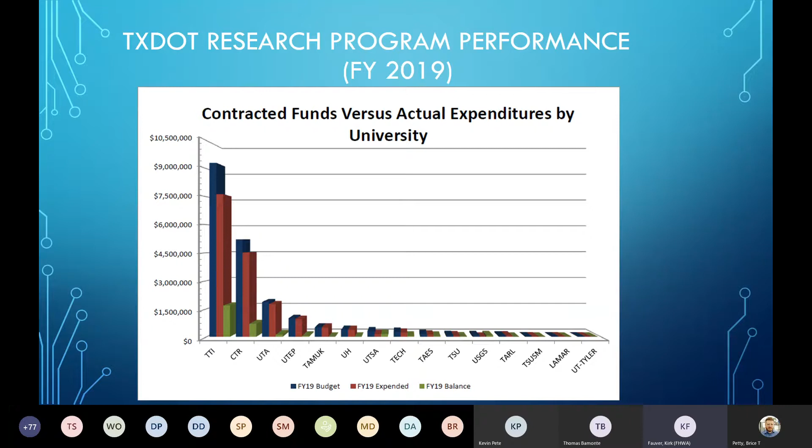These are the contracted funds versus actual expenditures. I think TxDOT RTI has a goal of 85.5%, and I believe we're meeting that across the board by each university in terms of the amount allocated for contracts versus actually spent. Next slide.

These are expenditures by program. Research by far has the largest amount of program funding, about $14.6 million. And for implementation, about $5 million. Next slide.

TxDOT has a research activities website, so if you wanted to find out more about the TxDOT research programs, there's a keyword search you can look up, like drones, disaster response, the value of research, work zone safety. Those are hot topics, and video summary reports for completed research. Some of the completed research products are available. Next slide.

Functional area committees - I'm going to skip over this because Kevin has already mentioned the functional area committees.

These are the 5 functional areas. Research Oversight Committee.

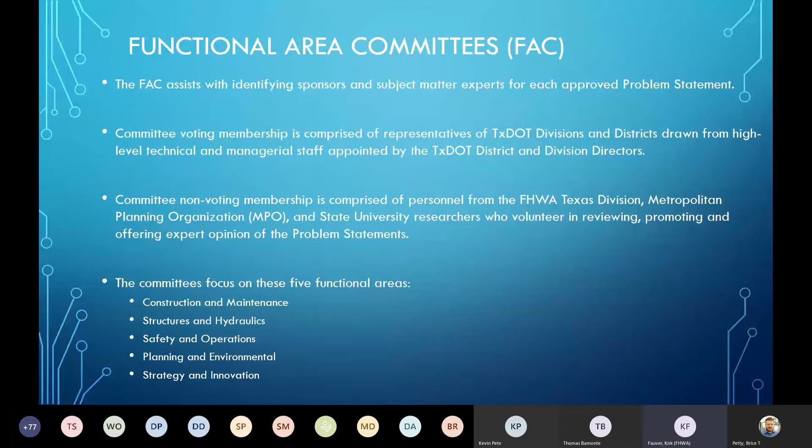This is the 15 ROC members. There are 9 voting members of 5 division directors that Kevin mentioned, the 5 non-voting members, and there's 1 member from Federal Highway Texas Division that make up the ROC.

This is more information about the ROC, who and when they meet, and how they discuss and prioritize the recommended list of problem statements before submitting the final recommendations for approval to the executive committee.

As part of the research selection process, the problem statements are gathered and the TxDOT portfolio manager reviews the problem statements for completeness, eligibility, and so forth.

The problem statements are rated, prioritized, and the FACs are meeting to discuss the problem statements. They are reviewed and combined at some point if they are of similar nature, and the resulting list goes to the ROC.

This is more information about the research selection process and how the problem statements themselves are converted to project statements, and then as the basis of requests for proposals are sent out to the universities for bidding purposes.

This is a diagram that shows the committee involvement in the research program - the functional area committees, the research oversight committee - and it is a loop that goes around. Federal Highway approves the work program development, but it goes back, and the research program is approved and the projects are activated.

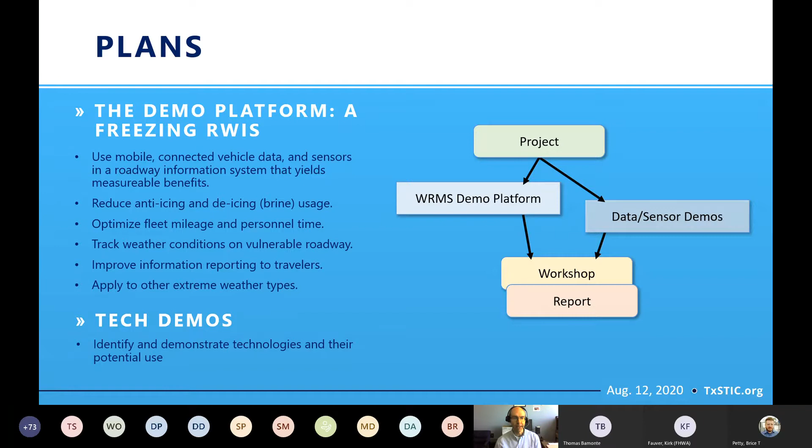Next slide, please. So with that, our strategy really comprises these goals of trying to reach objectives of reducing brine treatment, reducing impact on roadways, and reducing the effect of travel time changes when there's winter weather treatment. As researchers, we have certain ideas on what's possible, but really the most effective way to prove or generate ideas is to have technological demos—to demonstrate real technology in real scenarios and see if our ideas work, and see if new ideas come about in the actual application of those demonstrations. Next slide, please.

Our demo location is within Abilene, Texas, which is a moderate-sized city in a very rural area. They actually do have winter weather and have to do a lot of work to proactively prepare for it, continuously treating the roadways during times of impending winter weather so that severe ice situations and dangerous snow buildup do not happen. This is a very interesting area because it provides a good proving ground for the use of the sensors and the computing backend analysis that we're trying to apply to the project.

In a nutshell, we're illustrating the effectiveness of this project by describing the sorts of data sources that we're trying to put into places that are very accessible to traffic operations personnel. First of all, there's the already existing Lonestar active traffic management system.

There's also the GeoEvent server and Esri resources that TxDOT is starting to bring on within their redeveloped IT infrastructure. Part of that infrastructure has the ability to take in vehicle locations and trajectories from a fleet management system being deployed within TxDOT now. Almost all TxDOT vehicles are equipped with a fleet tracking system able to track GPS locations of those vehicles for reporting purposes, and also to have live data go into a GeoEvent server where ArcGIS-based applications can leverage that data for real visualizations.

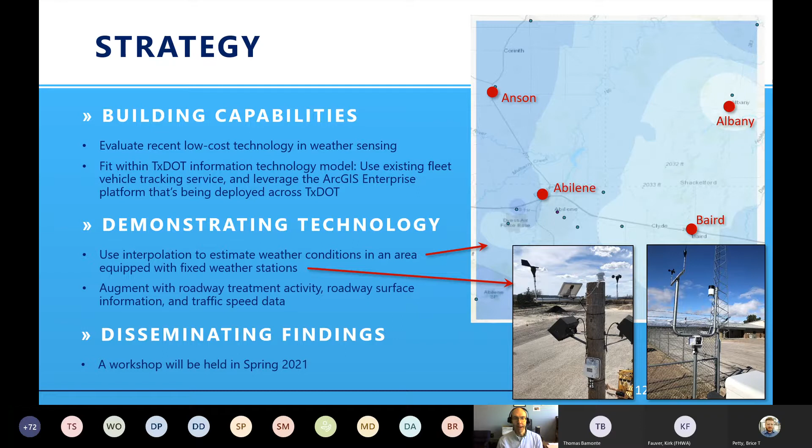We're also planning to hold a workshop in spring next year, which will describe what we've done, what sorts of sensors we used, what we could expect from them, and have game plans for how other districts can implement similar systems within their own places.

Right now, we're working with an engineering firm within the Abilene area on being able to equip winter weather treatment vehicles with sensors that detect whether the sprayer is turned on or off, whether the spreader is actually spreading sand on roadways, or if the plow is lowered or raised.

These are actually rather simple sensors, but they involve some expertise to design. Within the project, we are designing four sensor kits that will be installed on four different vehicles, and we'll document exactly what those sensors are and how they can be hooked into the existing fleet management system. Again, the whole goal is to be able to reproduce this effort within other districts so that they'll have the same capabilities as what we're trying to demonstrate within the Abilene district.

In fact, today I'm going to be hopping in my car and driving up to Abilene to meet with that engineering firm tomorrow for delivery of those 4 sensor kits. So this is a very exciting time for the project in that regard.

Meanwhile, researchers here at UT are working on incorporating the data feeds that will be coming from those sensors across the fleet management system into visualizations based on the ArcGIS Online platform. We're also working with Devin Smith on some of the tracking systems and visualizations he's working on, so that we can add winter weather treatment activity to those same visualizations, which have already been demonstrated to a few folks within TxSTIC.

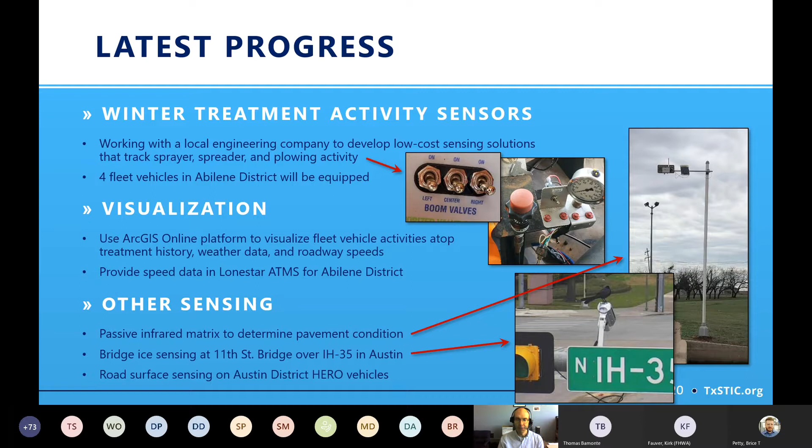We'll continue to push forward with our bridge ice sensing effort on the 11th Street Bridge in downtown Austin, and also work on incorporating one of the road surface sensors on a HERO vehicle for incident detection within the Austin district.

Next slide, please. Our schedule looks like this: the winter season is coming, and during that time we will be collecting data during the freezing days and really understanding what kinds of data, and what we can do with the data, from those winter weather sensors.

And then in the spring we'll have that workshop. Stay tuned for the date on the workshop, most likely held virtually and, if permitting, in person in Abilene. Next slide, please. This is a log of activities that we've done for the project.

Right now, imminently, we have our bridge deck freezing — we had in February the bridge deck freezing measurements. And then imminently this month, we're going to be receiving the 4 sensor kits for equipping the winter weather treatment vehicles in Abilene. Next slide.

So with that, I thank you for your attention and invite any questions that you have. I don't see any questions or hands raised, which I'm surprised at. This is a great presentation.

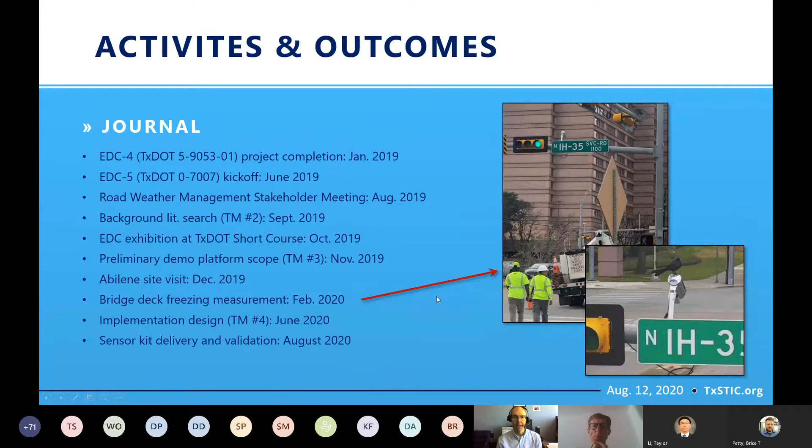Yes, if feasible, can you go back about 5 slides? There's a data architecture slide where we've listed the various sources we're looking at. Because of the time limit of the presentation, I just wanted to focus on the weather sensors we're deploying, but we're also looking at the West Texas Mesonet data sources, which have a couple weather stations within the area, and also the National Weather Service. We want to overlay those as part of the data sources available among the weather stations we're deploying. With that, we'll have a better sense of what we can get from weather sources that already exist versus the sources we're deploying. That can help us answer questions on how worthwhile it is for us to deploy our own weather sensors, or whether we can really rely upon those weather sensors provided by other entities.

With that, we can also get a better sense on reliability and resilience, just in case there's failures, or if we have a situation where we have various geography which would really isolate weather scenarios or weather phenomena within localized areas. So all these are very valid questions I'm hoping we'll be able to present more in depth in our seminar that we'll have in the spring.

Yes, I have heard of another project happening — Wade might have to remind me on this. There's a district up north that's also doing a test equipping winter weather treatment vehicles with sensors that detect treatment activity. There's also other DOTs across the United States very actively looking into this. In fact, that's going to be a lot of the talk happening next week at the Road Weather Management Stakeholder meeting happening federally, virtually.

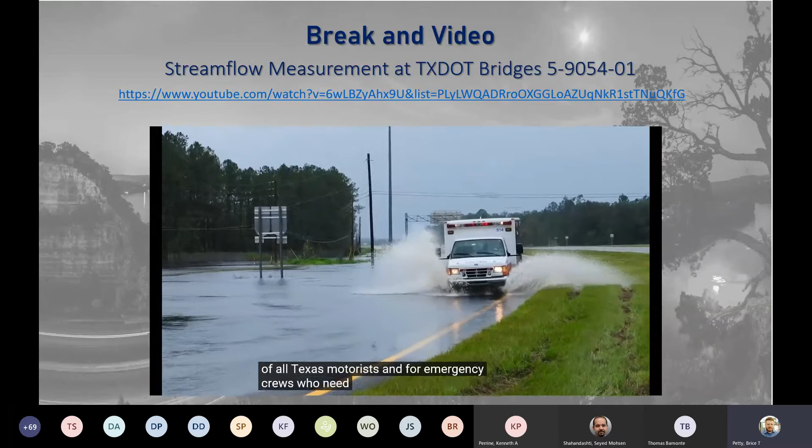Imagine being able to predict when rivers and streams will flood and make a roadway impassable hours before it happens. It would be huge for the safety of all Texas motorists and for emergency crews who need safe passage in order to provide help.

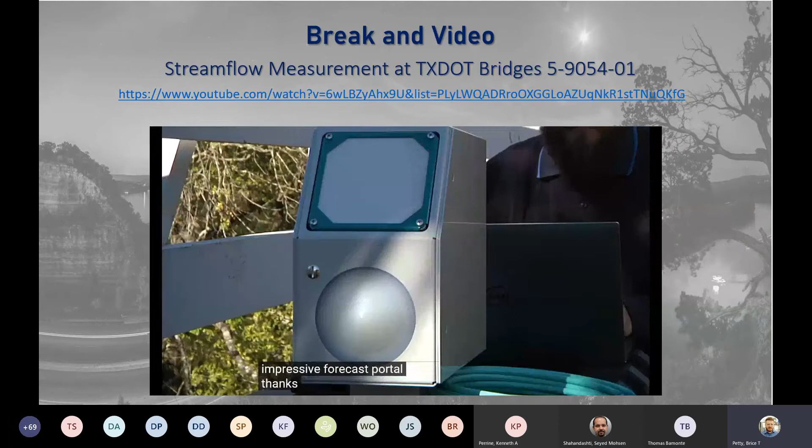Researchers at the Center for Water and the Environment at the University of Texas have built an impressive forecast portal, thanks to unique radar sensors installed at 20 major water crossings along Interstate 10 between Beaumont and San Antonio. With 27,000 bridge locations in Texas, this could be just the beginning of an entire bridge system that could be monitored online, forecasting floods and saving lives across the state.

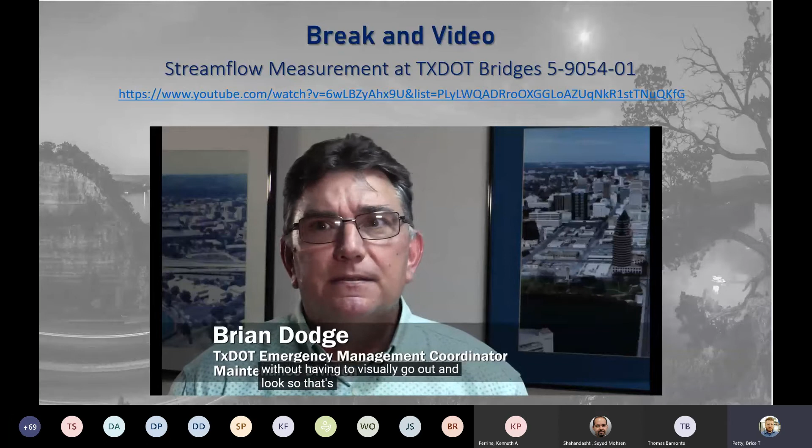These stream gauges are giving us information we've never had before without having to visually go out and look. That's a benefit in itself. Knowing that there's a flood wave coming downstream and it might affect one of our structures or critical routes is key to being proactive when it comes to emergency management instead of reactive.

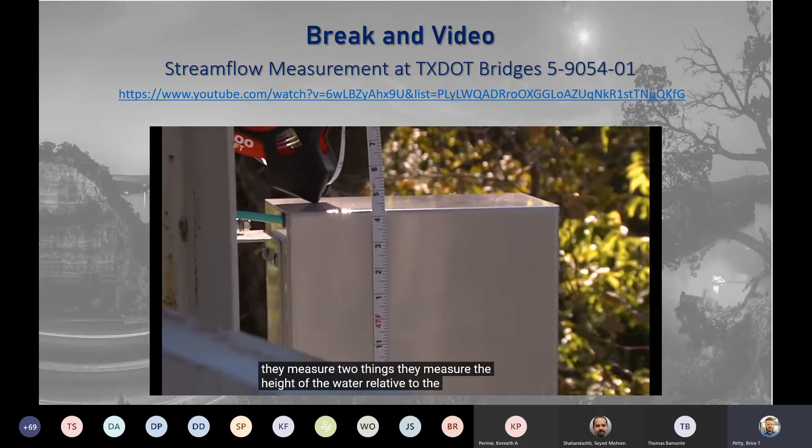The gauges we're putting in are non-contact gauges that work with radar technology. They shoot a radar beam down to the water level and measure two things: the height of the water relative to the gauge, so they know how close or how high the water is, and the speed of the water as it's moving. So they measure depth or height, and velocity.

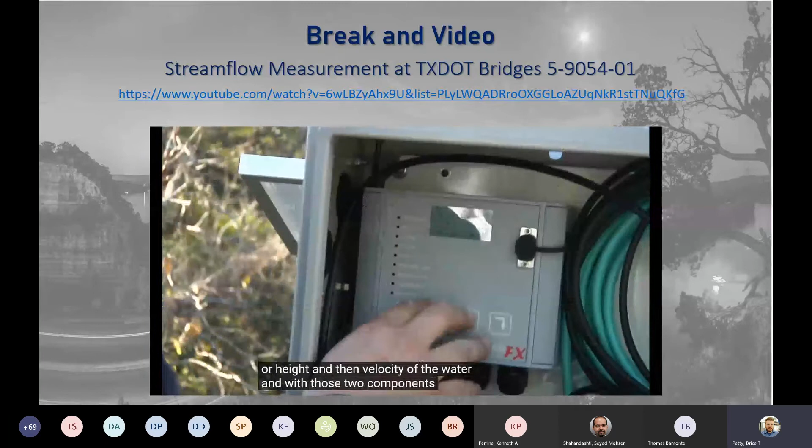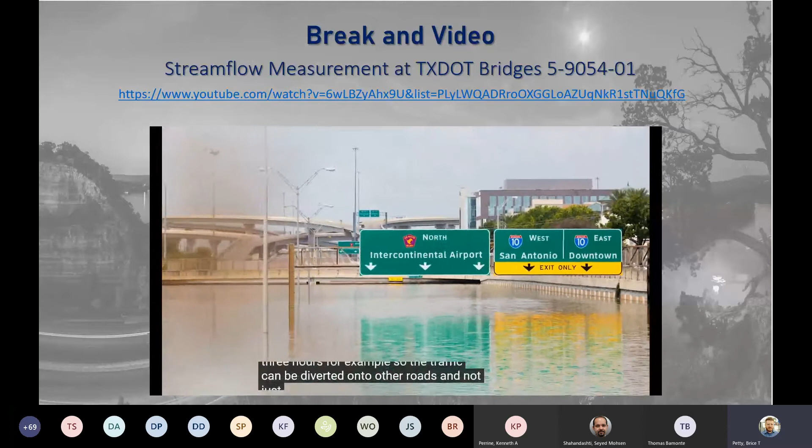With those two components, that information feeds back into the system to try to predict what's going to happen. With that, we'll be able to more accurately understand the likelihood that I-10 will be flooded, and forecast it. So it's not just that we'll have to close I-10, but we can anticipate that I-10 will be closed in 3 hours, for example, so traffic can be diverted onto other roads instead of suddenly reaching an endpoint with no place to go.

I-10 was selected as a key primary roadway. We cared about that, and we saw for Hurricane Harvey and other events that I-10 is a pretty important corridor, and when it goes down, we need to be able to reroute traffic and have alternate routes available to folks. So you click on a given gauge, and it pulls up information about that gauge.

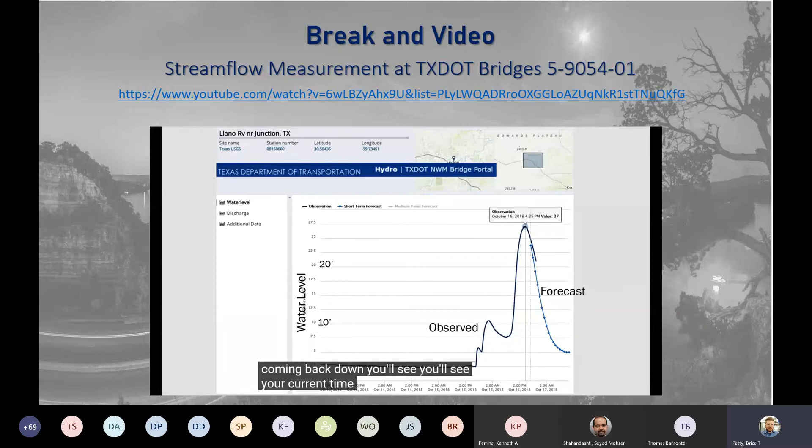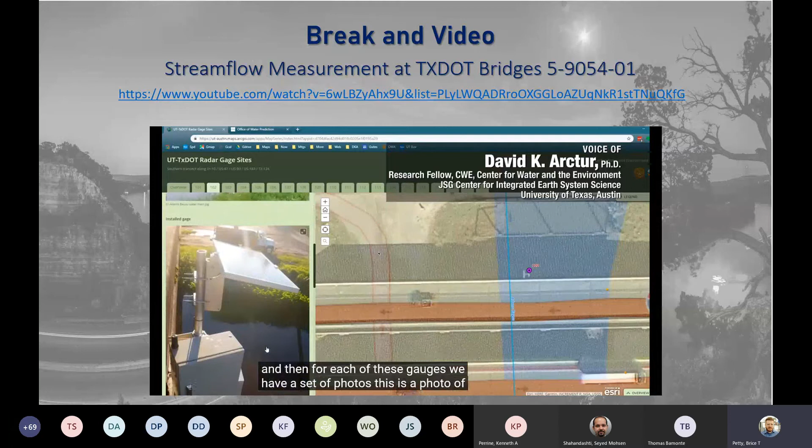What you'll see is basically a stage hydrograph, the level of the water going up and going down, some prediction of the water peaking, flooding at the height, and then coming back down. You'll see the current time, and then the prediction moving forward in time of what's going to happen in the future. For each gauge, we have a set of photos of the installed gauge, and elevation data detail, so we know the distance from the top, to the lower chord, to the water level, and to the stream bed.

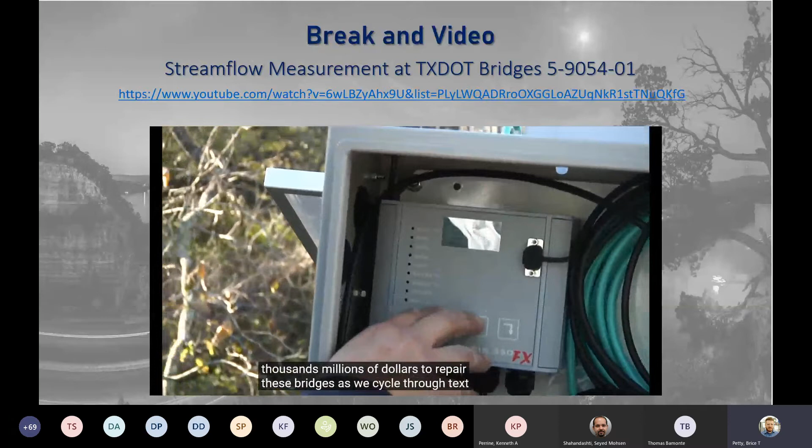It's kind of an exciting thought that as our bridges get repaired, these bridges are hundreds of thousands, millions of dollars to repair. As we cycle through TxDOT over time and repair these bridges, the cost of installing the gauge isn't that expensive relative to the cost of the bridge. So there's real potential to work it in as an optional but regular feature on certain bridges.

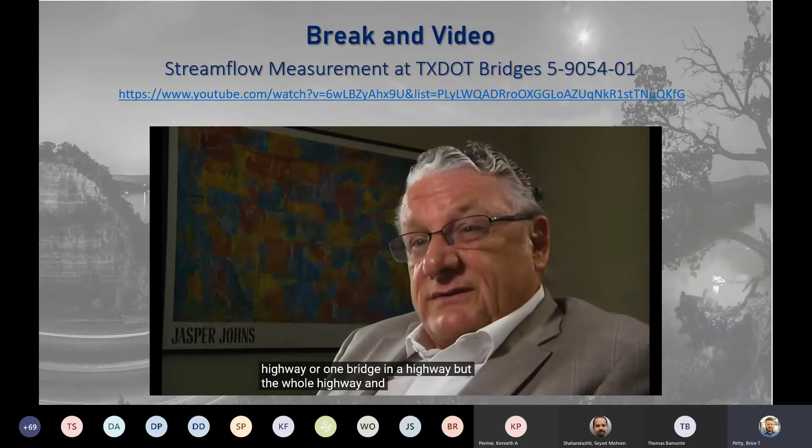We're not just talking about one bridge, we're talking about the whole bridge system here. Not just one highway or one bridge on a highway, but the whole highway. And that's not something that I, at least as a hydrologist, have really thought a lot about before.

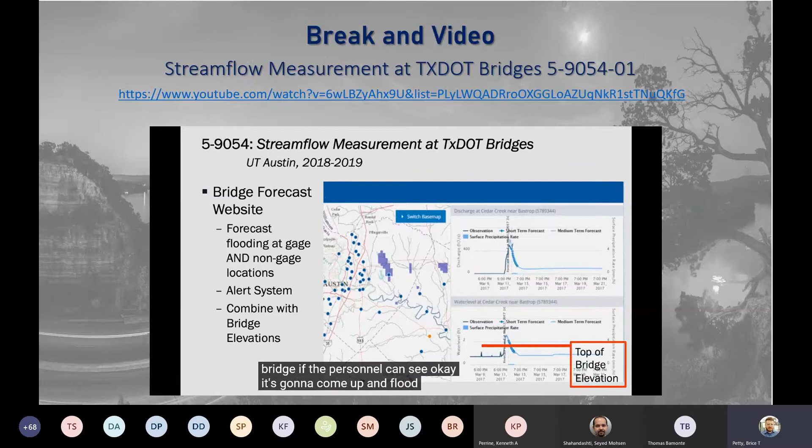The missing piece of information we're looking to supplement with this project is, what's the level of the bridge when you see that curve going up and down from the Weather Service? Such and such river's going up and down—how high is it going to get, what's it going to crest at? But with the elevation of the roadways and the bridge, if personnel can see it's going to come up and flood the road here, then come back down and not flood the road over there, you suddenly have a time window, a projection that these roads are going to be underwater for 2 hours, or 6 hours, or 2 days, or whatever.

Being able to forecast and anticipate that is what we're hoping to do—pull the information from the gauges to the website, and then the website can send alerts and notices to our response teams that have to deal with how to shut down those roads.

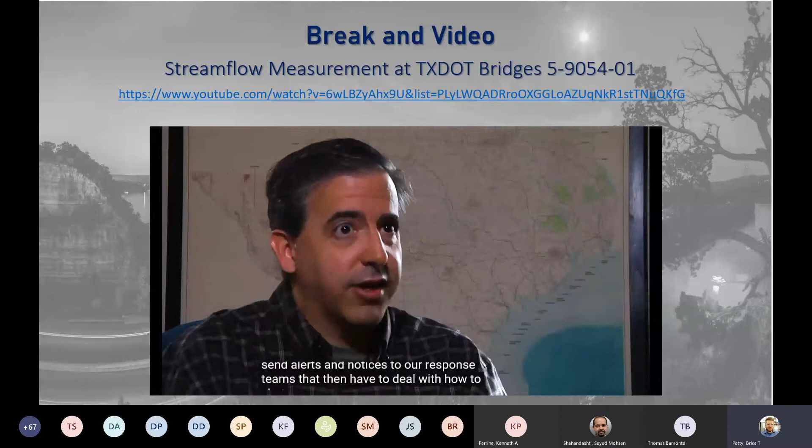Right now, we're very reactive when it comes to flooding. We have to see the flooding happen before we can react to it. This technology is probably going to give us some insight into what's coming, so we can stay ahead of it as much as possible and protect the traveling public.

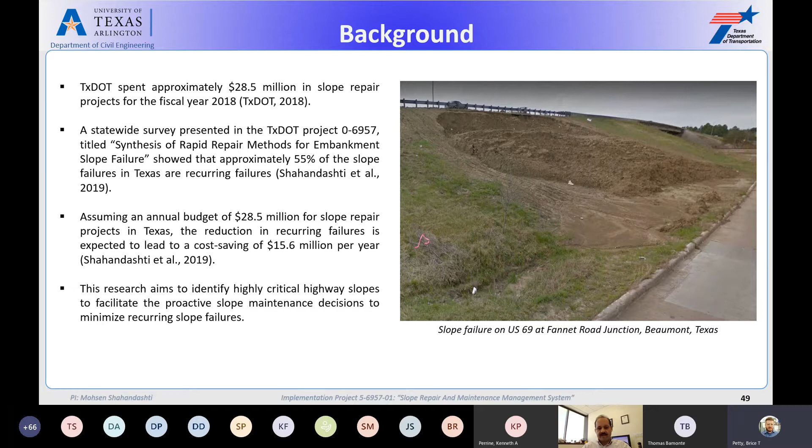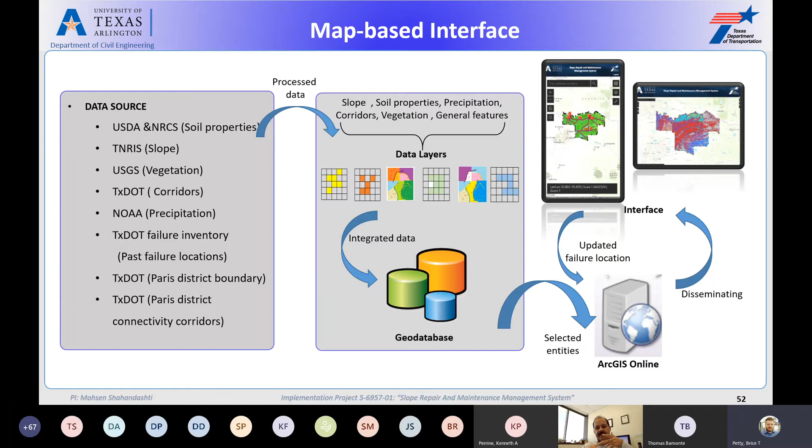We combined these data from different sources in a geodatabase, and we developed a map-based interface to visualize the data. This map-based interface is web-based and works on smartphones, tablets, and of course desktops. Next slide, please.

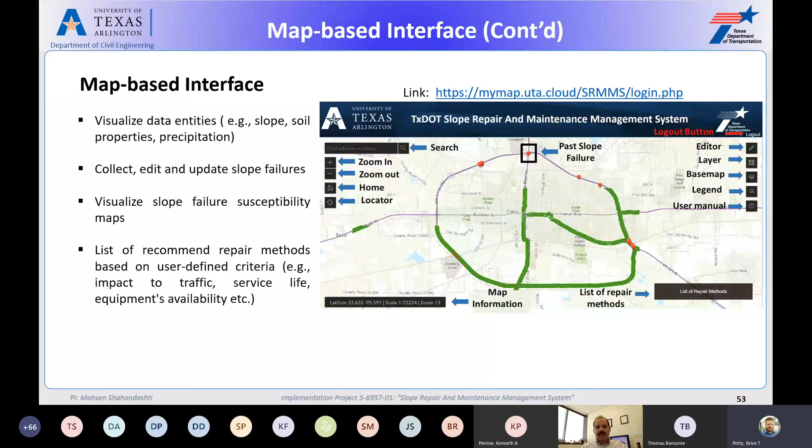This map-based interface helps us visualize the data that we collected. We can collect, edit, and update the slope failures, visualize the failures, and come up with recommendations for rehabilitation that minimize the chance of recurring failures. For now, access to this system is protected by password, so only TxDOT personnel can, after signing up, log in and use the system. Next slide, please.

Highly critical means that the trigger is rainfall. All our models are rainfall-induced models. If with less than 3 days of raining we have a critical situation, we call those segments of slopes highly critical. If between 3 and 10 days of raining makes it critical, we call it critical, and so on and so forth. So we color-coded the susceptibility of slopes along highways.

Our physics-based methods are based on factor of safety, and the trigger is duration of raining, and I mentioned how we color-coded that.

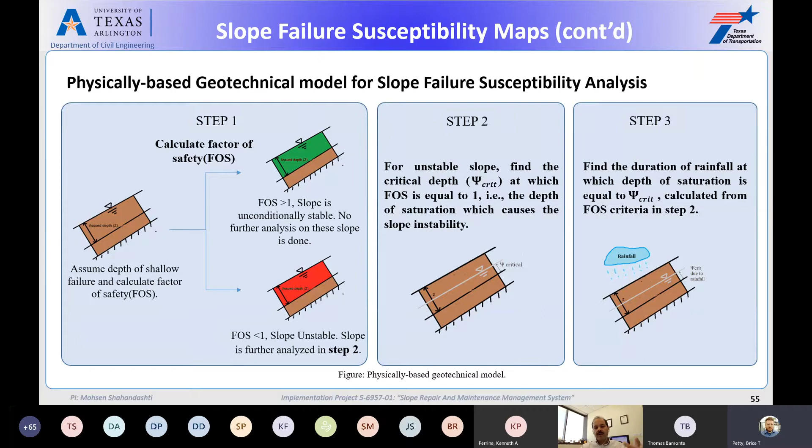Our models, we also calibrated them for previous stabilization efforts. We found that in many areas that we find critical, we already have mechanically stabilized slopes that are not critical anymore. Also, we calibrated our models for vegetation density of slopes along highways.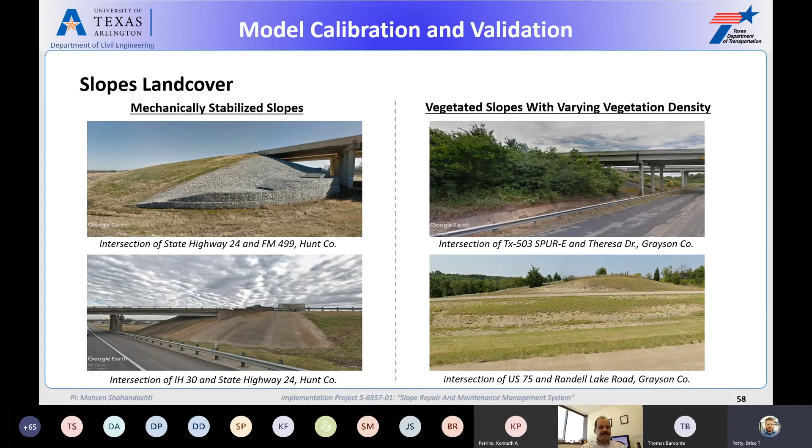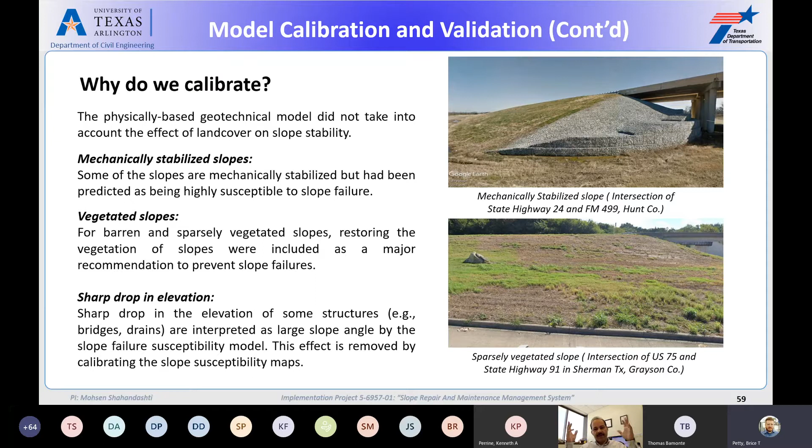In addition to mechanically stabilized slopes and vegetated slopes, we sometimes have, interestingly, sharp drops in elevation, but it's not necessarily a slope. Our system was showing them as critical, but they are not really critical. So we calibrated our models to remove those as well.

For example, for retaining walls, how we calibrated is we superimposed the images of the stabilized slopes on top of our susceptibility maps, and we removed them as critical, as you see in this figure.

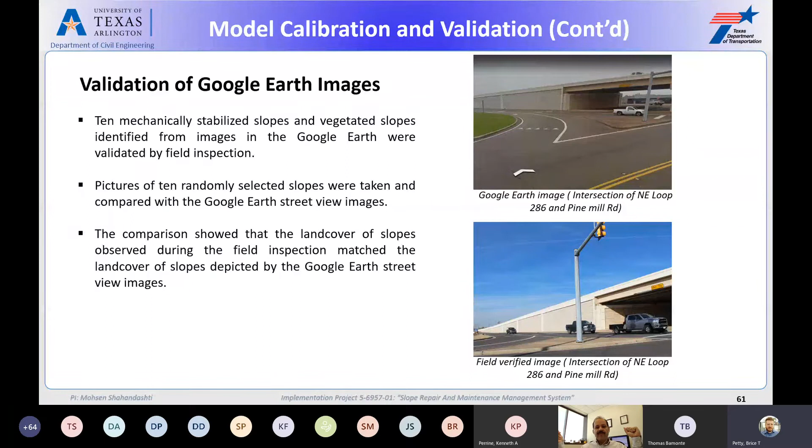Since we used images for this calibration, we validated our images with extensive field work.

On top of all these, we created a multi-criteria decision support system to recommend the slope repair methods and rank them. We integrated this system with the slope maintenance management system.

Using the ArcGIS method, the web-based method, this integration offers a list of repair methods. If we want to repair somewhere, with a few clicks we can find a list of methods. We can add our criteria, and we get a list of top 5 repair methods that can be used there.

For each of these repair methods, we compiled a list of best practices to minimize the chance of failure for that type of repair.

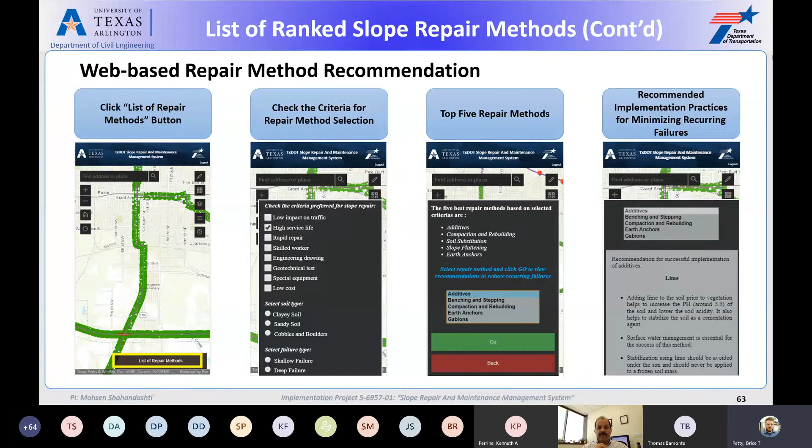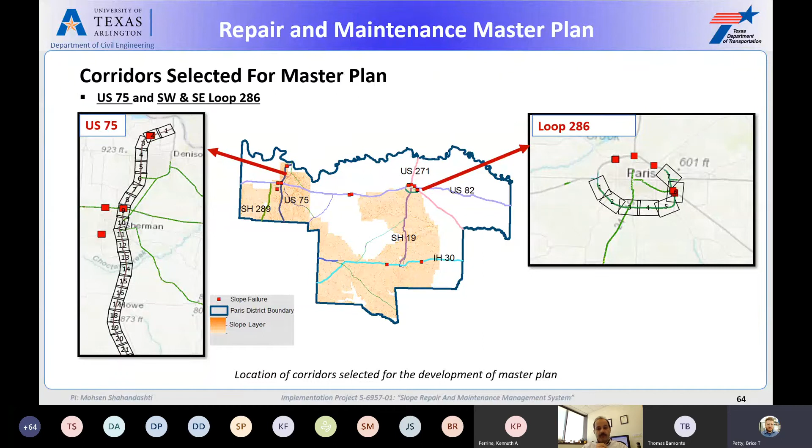We are preparing a master plan for 2 major corridors in Paris district, US 75 and Loop 286 around Paris district.

We divided these corridors into 1.5 mile strips, and for each of those we are highlighting the critical slopes, indexing them, and also creating Google Earth images of those areas that are highlighting the vegetation and water management system conditions.

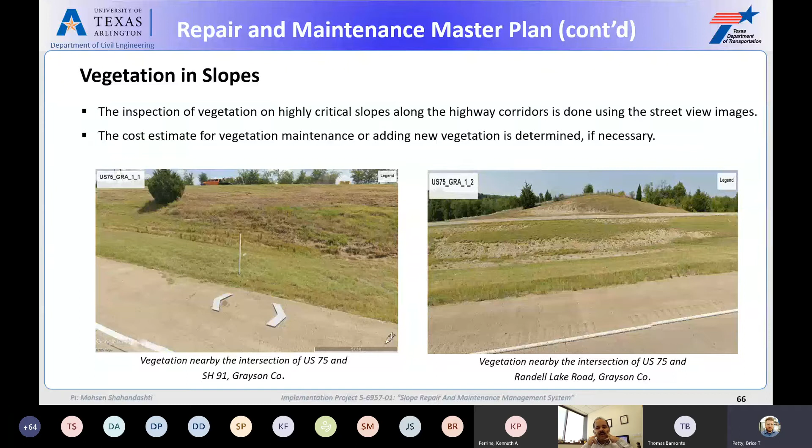Especially, we are interested in vegetation around those critical locations. We provided figures to show how critical they are, if they are in good condition or not, and if they are not, we are recommending the repair of them.

We are evaluating the water management system on those critical slope locations. If we need repair or maintenance, we are highlighting that on the master plan.

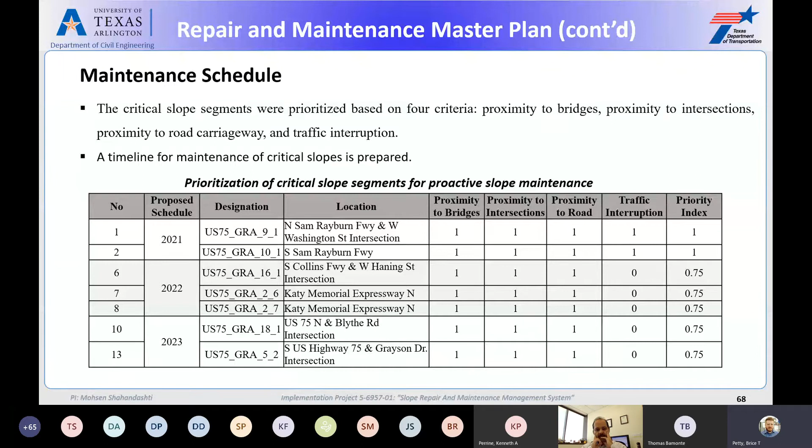We are putting together and prioritizing these critical locations in the master plan by their proximity to bridges and critical roads and intersections, and also the chance of traffic interruption. So we are prioritizing those sections as well.

We are putting together in the master plan the order of magnitude cost for slope repairs along highways for all of those critical locations that we found.

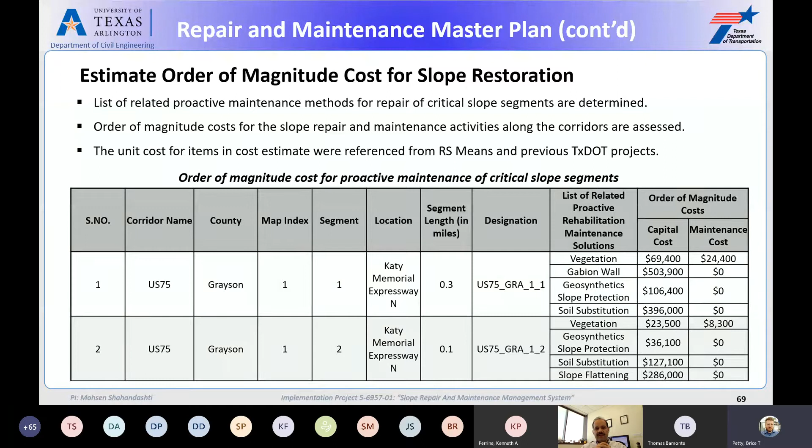And that's it. Thank you very much. I really appreciate that you listened to this presentation, and I welcome questions.

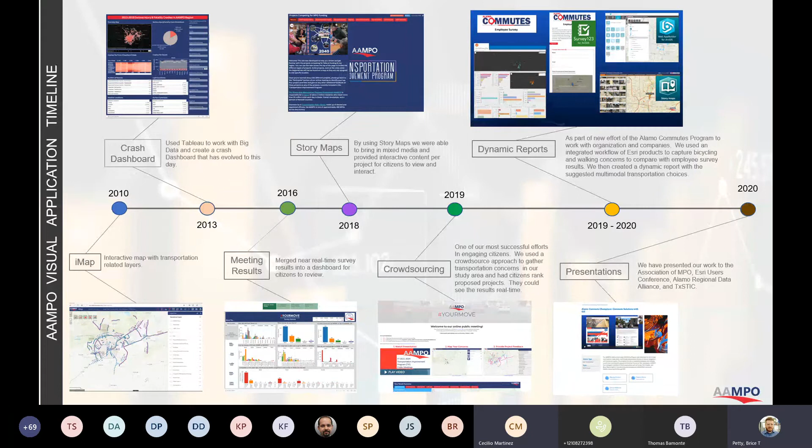So let's take a look at our first application. iMap was launched in 2010 and was our first application to go online. The interactive mapping viewer has multiple transportation-related layers and tools to assist you in your analysis. It also contains links to our open data site, our crash stats dashboard, and access to our travel demand model data.

Here's an example of freight data showing truck count and percent trucks within selected roadways. This visualization was greatly valued by local planners.

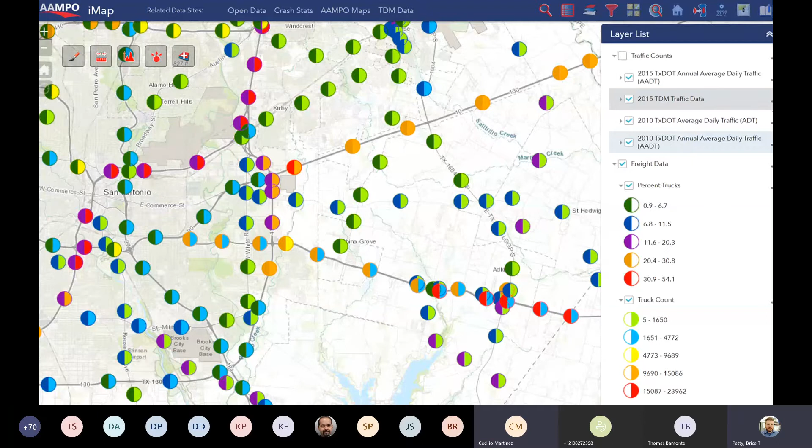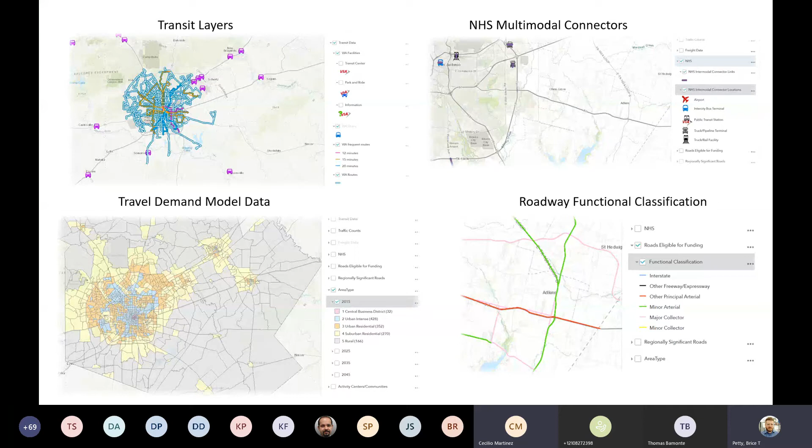We not only have our data layers on iMap, but also from our transportation partners like Via Metropolitan Transit, TxDOT, FHWA, and our travel demand model data. So you can tell we have a lot of useful data on this application. But as we started to get more robust data sets like the crash data, we needed a different solution.

Tableau offered an affordable solution, and by affordable, I mean free. Tableau offers a paid and free version of its application. We started using Tableau back in 2013 and still use it to this day. It's a powerful and easy way to visualize your simple and complex data. Here we have taken the crash data and created an interactive dashboard.

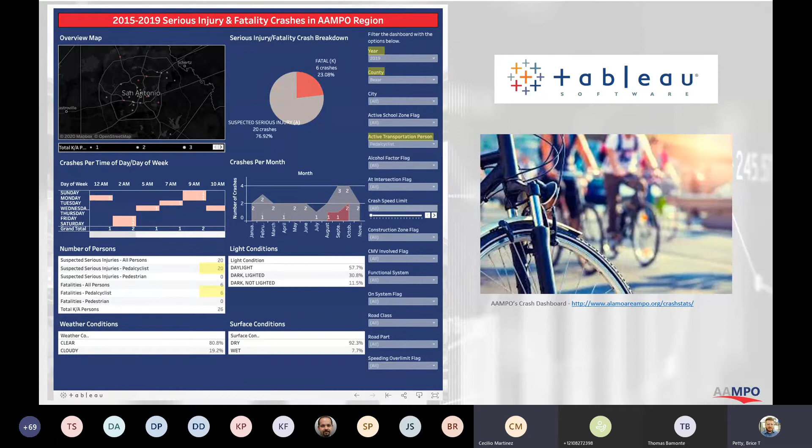With this dashboard, we're able to ask questions and based on our criteria, get answers. In this example, we can select the crash year of 2019, the county of Bexar, then select bicycle-related crashes only. The results are dynamic, displayed in an easy way to identify trends. Not only do you get stats, but also the locations of these crashes.

Next slide, please. One of our most interesting uses of Tableau is linking our travel demand trip generation forecast numbers to create an origin and destination interactive map.

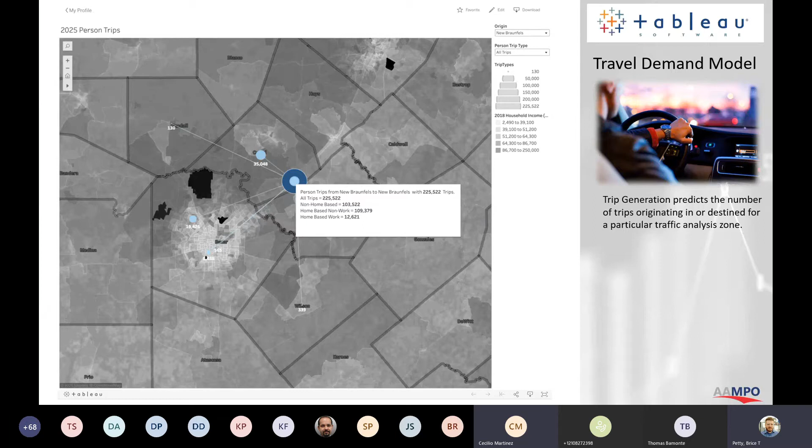Users were able to select areas within our study area and see how people moved in and out based on trip purpose. Here we can see 2025 person trips and how it relates to the city of New Braunfels' internal and external trips. Next slide, please.

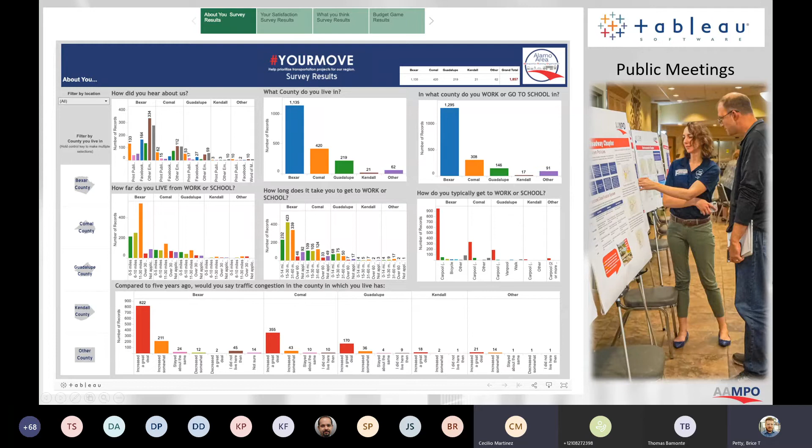Finally, we use Tableau at public meetings and online to visualize survey data from citizens and present the results in near real time. This was useful, but we needed more flexibility at our public meetings and online. As citizens became more tech savvy, the demand grew more for that interaction. Next slide, please.

So in 2018, Esri launched a suite of applications to include story maps. This was a solution that we could use to engage citizens in a more interactive experience. We were able to embed multimedia applications like YouTube videos, PDFs, and a mix of interactive maps. Next slide, please.

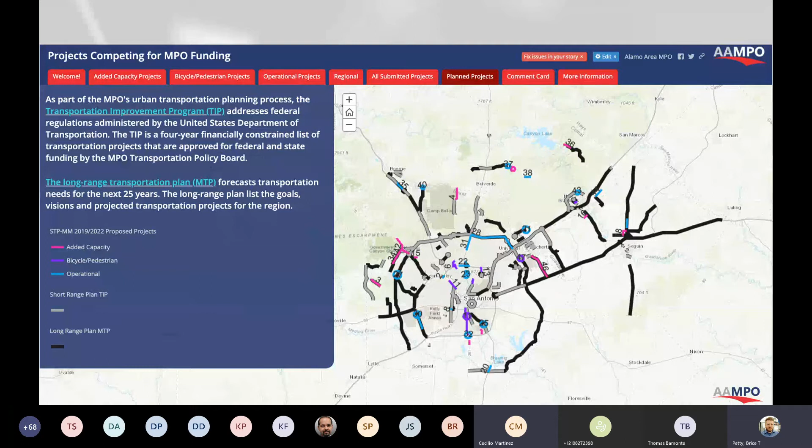Citizens were able to view multiple interactive maps in one location. Here we are showing the proposed roadway projects against existing projects for connectivity. This is a good start and was leading to something very promising. Next slide, please.

This was our very first true attempt at crowdsourcing, and this was part of our 2019 Your Move campaign. We created an easy step-by-step online experience for citizens. Two crowdsourcing applications were developed in-house: Map Your Concerns and Provide Project Feedback. Next slide, please.

On Map Your Concerns, citizens were given four categories: active transportation, public transportation, traffic congestion, and traffic safety. We asked them to identify their areas of concern as related to these categories. Next slide, please. So citizens could provide us with detailed information on their concerns, and others could rally behind it by liking it. Next slide.

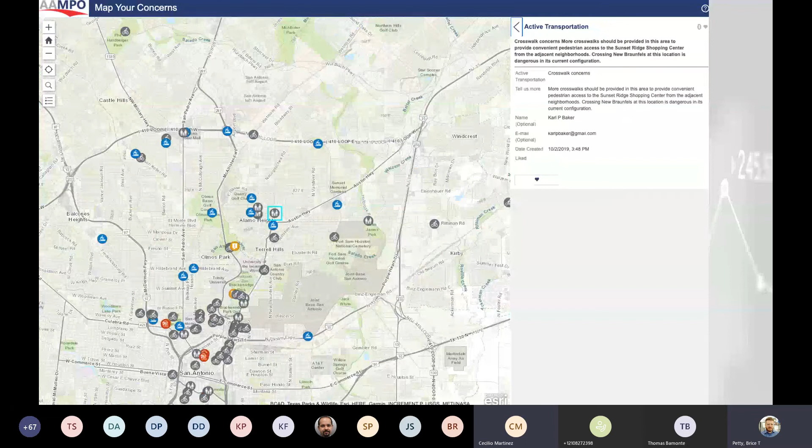Go back one slide. So we could then dynamically rank concerns based on the number of likes. Go forward one slide. There we go. As you can tell from this screenshot, you can start to see that ranking. As citizens were submitting their concerns, other citizens were able to like that comment, and that would then bring it to the top.

Next slide, please. The second crowdsourced application was Provide Project Feedback. In this case, we wanted comments on our current long-range and short-range projects. We were once again able to collect number of likes per project and also rank them dynamically.

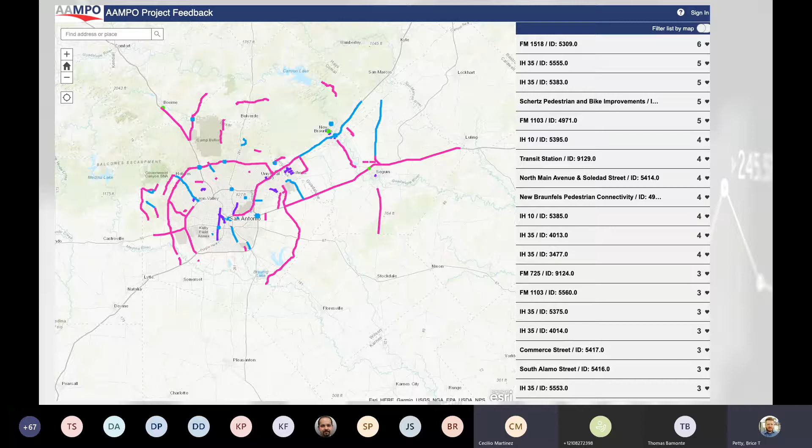Next slide. In addition, we were able to collect comments from citizens that we could then pass along to the project sponsoring agency. Next slide, please.

Citizens were engaged and found the application easy to use. We even had community leaders sharing the applications on their social media platforms. We found this endeavor to be one of our best outreach efforts. Next slide, please.

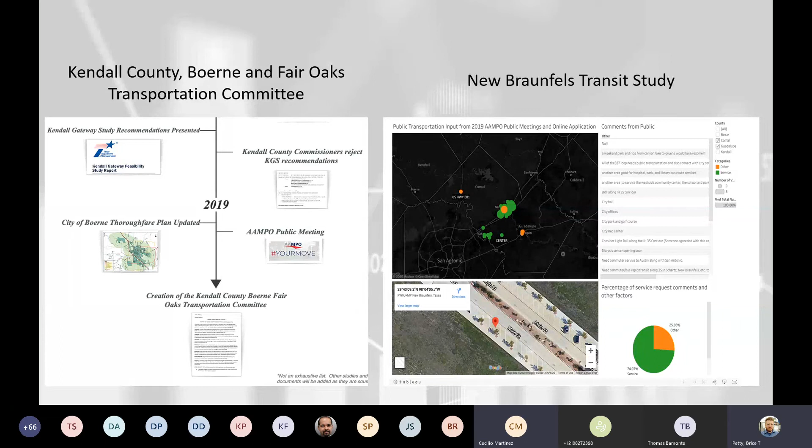The data collected from the Your Move campaign was used to supplement two separate transportation planning efforts: the Kendall County, Boerne, and Fair Oaks Transportation Committee, and the New Braunfels Transit Study. So we took that information we collected from the Your Move campaign and these other two separate planning efforts, then utilized that information. Next slide, please.

The Kendall County, Boerne, and Fair Oaks Transportation Committee were so impressed with the Your Move format and workflow that they asked us to create a similar campaign for them. They called it Plan Your Mobility. It very much mirrored what we had created for Your Move, and it was very effective.

Next slide, please. Finally, we were able to use all that we've learned with story maps, surveys, and crowdsourcing and applied it to the Alamo Commutes program. The program launched an effort to work with local businesses and organizations to encourage their employees to consider multimodal transportation options as they made their way to work. Next slide, please.

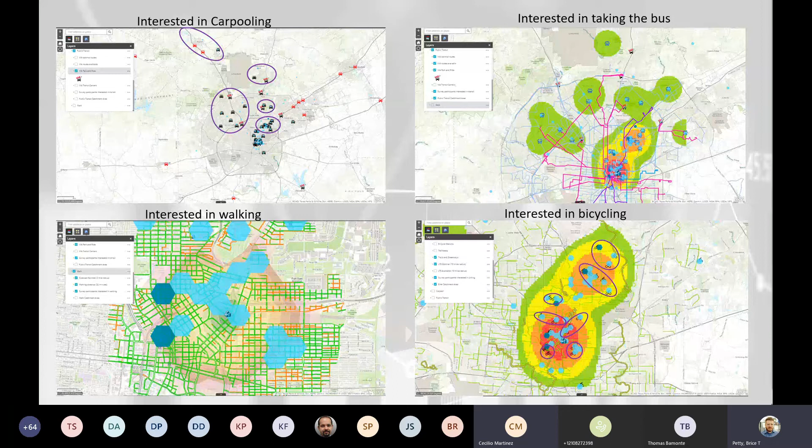Based on the employee survey, we were able to identify clusters of employees with similar interests and alternative ways to get to work, so we could match employees that would consider carpooling together.

The deliverable was a password-protected website with all the data and applications in a dynamic, interactive report format. This was taking all that information we had collected and providing it as a dynamic report, as opposed to just a standalone PDF. That's something we were able to create for them.

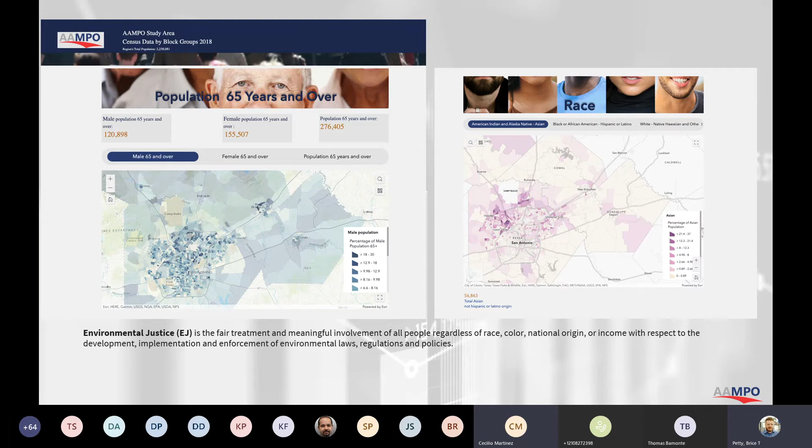Currently, we are working to improve our environmental justice layers with a new Esri application called Experience Builder. We're still in development, and it's looking very promising. These are some examples of how the Alamo Area MPO is leveraging data visualization applications.

Technology is an ever-changing landscape and takes a team to navigate to help keep our citizens moving. As we explore these new applications and other data visualization platforms, we hope that they will encourage and promote civic engagement in our study area. And that's pretty much it. If y'all have any questions, I'll be happy to answer them.

Thank you so much for that presentation. Really inspiring, the work you're doing. Kirk, you have your hand up?

I just had one question. The use of your GIS for EJ and Title VI type of analysis, what efforts are being planned to develop an analysis framework for low-income and minority communities within your area, especially for those areas that don't have access to computers or the digital divide situation?

That's something we're still in development on, but we have some local data people I'm associated with, the Alamo Regional Data Alliance. There's a young lady there, Emily Royall, who used to work for the Rivard Report and now is with the City of San Antonio. She has pretty comprehensive digital divide resources for some layers. That's something we can definitely look at if we need to add it to our EJ work. Like I said, we're in the process of updating all that right now, so that was kind of a sneak peek, but there is information out there from our local data groups looking at that digital data divide.

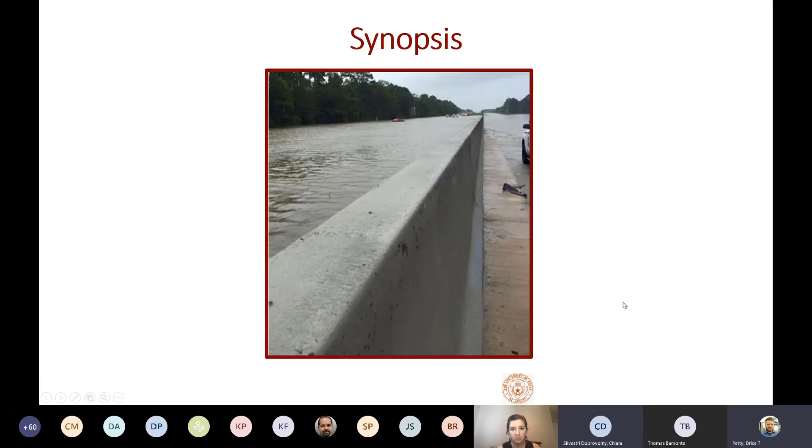This photo shows what actually had to be done at one point. I think this was in Beaumont, in the Beaumont district. The only way left was to basically explode the barrier, to allow the water to go from one side to another and slowly drain it for whatever could be done. And of course, as we talked about before, this is an infrastructure and maintenance topic - it's not just a problem with the barrier functioning as a dam, but if you explode it or find similar ways to drain the water, you're left with something you'd have to rebuild. You need to keep the road closed until everything is set up. So there are a lot of consequences to this.

So the objective of this project was to develop a median barrier that would be needed to be implemented at flood-prone areas.

The main objective for this barrier would be to accommodate the passage of flood water and therefore reduce the severity of flooding like we saw in the previous photos. Hopefully decrease the risk to motorists and others in the area. I mentioned about the neighborhood.

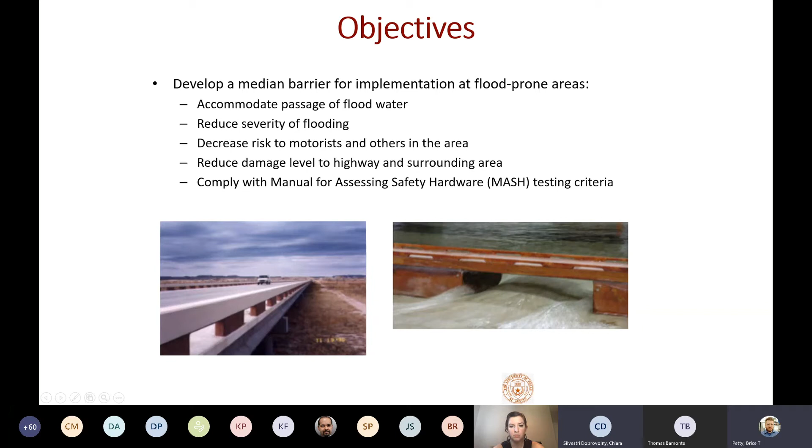Talk about explosions or some drastic needs of that level. But let's not forget that these barriers are ultimately implemented, like I was mentioning before, in median areas to prevent errant vehicles from going to the other side. So the barrier that we were going to develop would have to be designed and would have to comply with the latest testing and evaluation criteria for the safety hardware, which is called MASH, the Manual for Assessing Safety Hardware.

Next please. So actually the slide, if you click one more time, there it is. Okay, so this project was a 2-year-long project that looked into developing and evaluating design concepts, and we did have to include different tasks in our approach. Because of the specific objective of this project, we had to include conducting large-scale hydraulic testing, as well as detailed design through computer finite element analysis.

Just because of the sake of time for the presentation today, I'm not going into every single detail, but the presentation will specifically highlight the large-scale hydraulic testing that was conducted, that Dr. Johnson will talk about, the design concept that was chosen by the panel, the construction of barrier systems, and the full-scale crash testing that was performed on the barrier system per MASH standards.

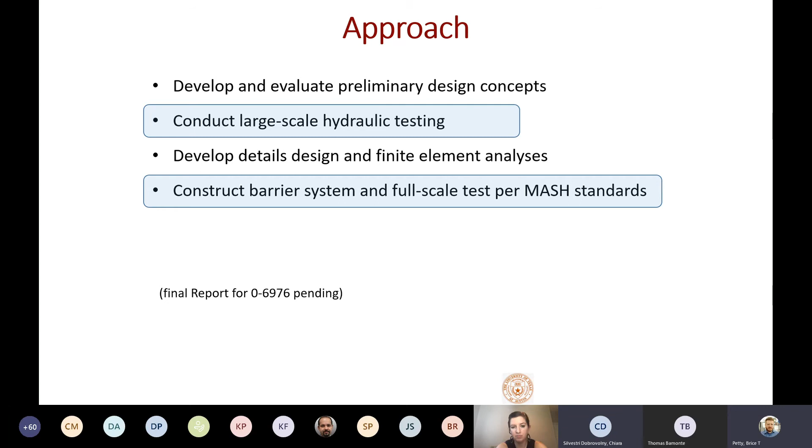Next please. And before I let Dr. Johnson talk on the hydraulic part, I just wanted to give a quick idea of the different potential designs that we proposed, because it's going to be helpful to understand the work in the hydraulic section that she did and will talk about.

Earlier in the project, we brainstormed to propose potential designs. I mentioned in this slide the 3 specific potential designs that were proposed. 2 of them were concrete-only barriers, and the third one was actually a steel-only barrier design, all for median applications.

The first one is what we have called the large scupper median barrier. It's a 42 inch tall, single slope concrete median barrier. Looking at the elevation view, it might not be very easy to understand, but we have pictures later on. It was proposed and ultimately designed to have 30-foot long segments, and within each of these 30-foot segments, 18 feet was basically a scupper, and the scupper was 13 inches tall. So you'll see from the photos later, it's a huge scupper that was designed.

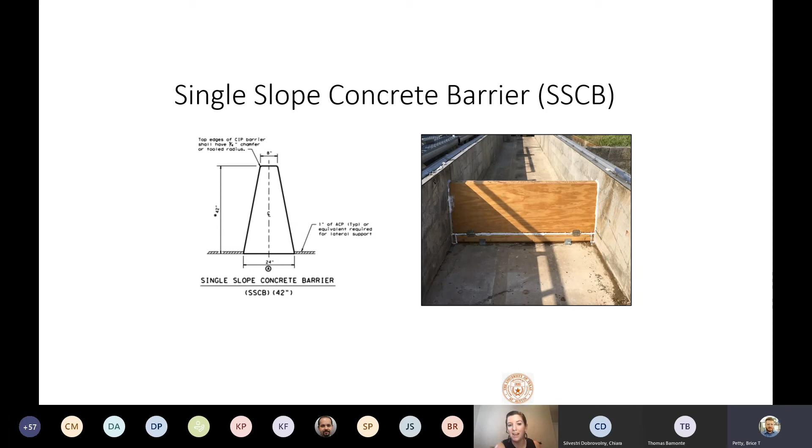All right, so we did testing on this. Next slide please.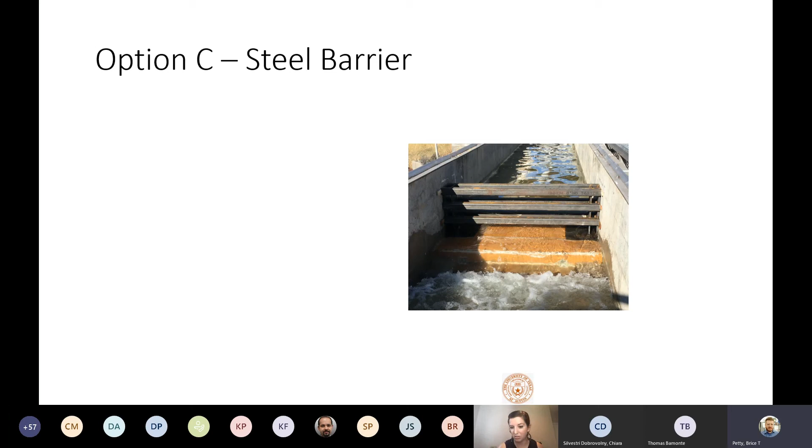All right, next slide please. One final thing to consider was that once these barriers are installed on an actual highway, there may be maintenance to the highway before the barriers are replaced. So we need to consider: our normal installation is shown on the left with the orange base, that's the fresh installation. But later on, there might be asphalt overlaying the road by 2 inches on either side — they won't pave through the barrier itself, just in front of and behind it. So we also did tests with a modeled asphalt overlay to see how much that reduces the hydraulic capacity of each of these barriers.

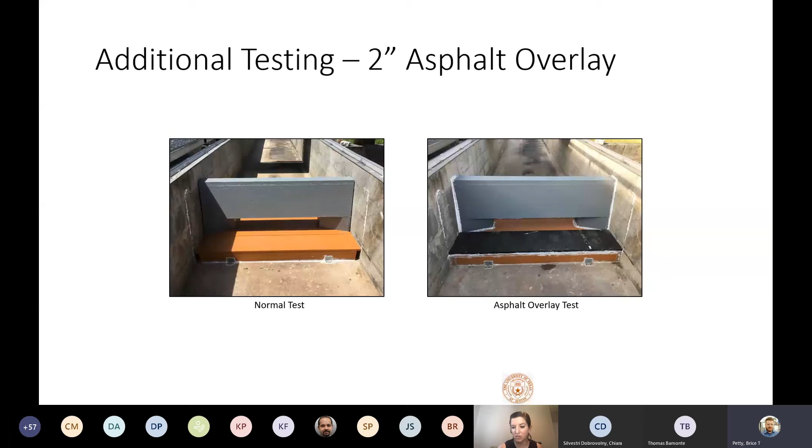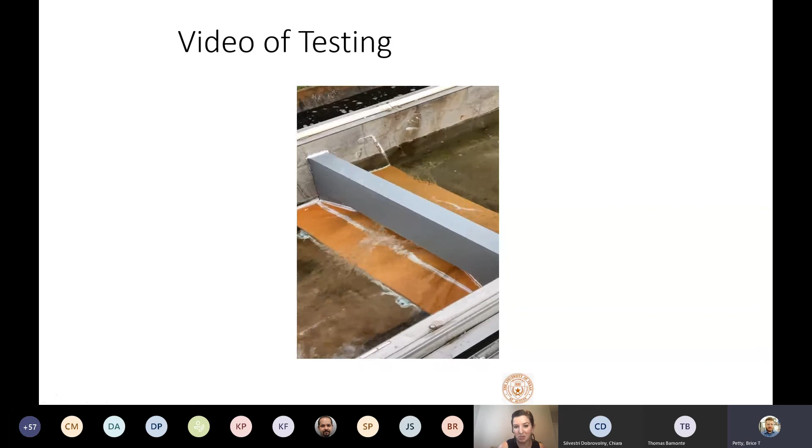We have water piling up behind the barrier, but there's also a ton of water coming through that opening. This is what we really want to see: can we maximize the water coming through without letting the water keep rising and potentially overtopping? We want to have the minimum water height as possible. So this shows that, thank you.

Alright, let's go ahead to our next slide. I could watch that all day, but I know you guys all have other things. And speaking of all day, we've hit 3:30, so if you could move to finish up that'd be great. Okay, sorry, I'll go quick.

So this is our rating curve. The top orange points show our worst case scenario, the solid barrier we have now on the highway. The blue case shows us the barrier with an opening. The red is the post and beam, and the green is the steel barrier. Basically, the more open the barrier is, the more flow you can get through while minimizing the water depth.

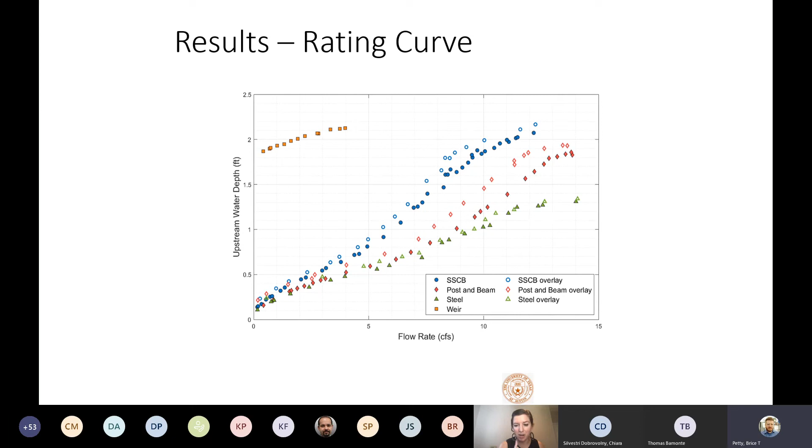According to this diagram, our steel barrier is hydraulically the best, but for crash purposes it's going to be difficult to implement. At least we know there's a significant increase or improvement in hydraulic flow with any of these barriers. We also have the overlay points here; they cause a minor reduction in flow, but not significant. So we can go ahead to the next one.

This I'll mention really quick. HEC-RAS is a great model, if you want to talk about it offline send me an email. This will tell us how we can predict what the future flood depths will be once these barriers are installed. HEC-RAS is used to look at bridge crossings, but not so much in open floodplains where we may not really think much of the topography.

So we've developed an iterative approach where we can figure out how to implement different barriers and predict this before we go out, knock a barrier down, and put a new one on the highway. This is still kind of in progress. It would be a great future development project to get real topography data so we can predict this in different floodplains. Alright, next slide.

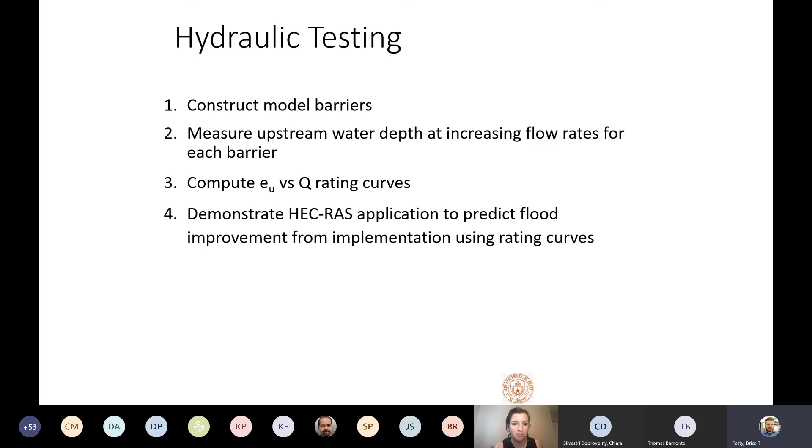And I think that's back to, oh no, keep going, sorry. Next slide again, I think we're going backwards.

One more, all right, there we go. This is back to Kira. Can you hear me? Okay, so that's a video, you can run it. I thought there was another video before, but we can start with this one. So according to the MASH standard criteria, you can go to the next video as well.

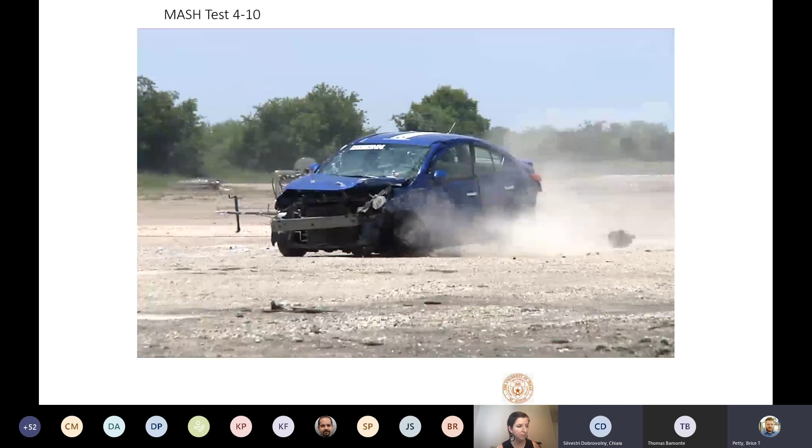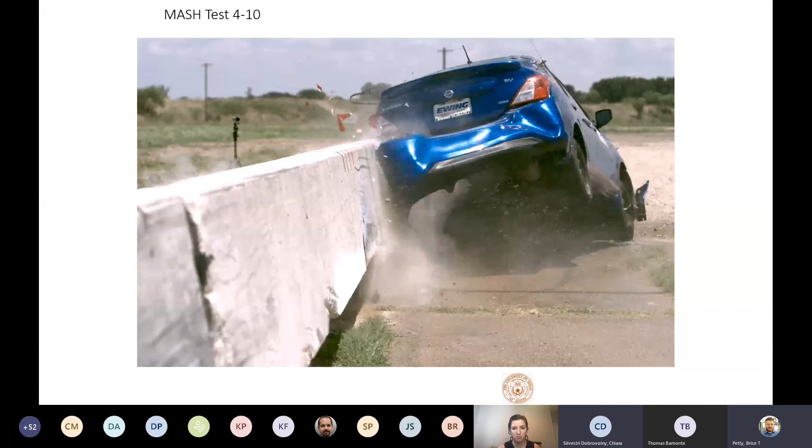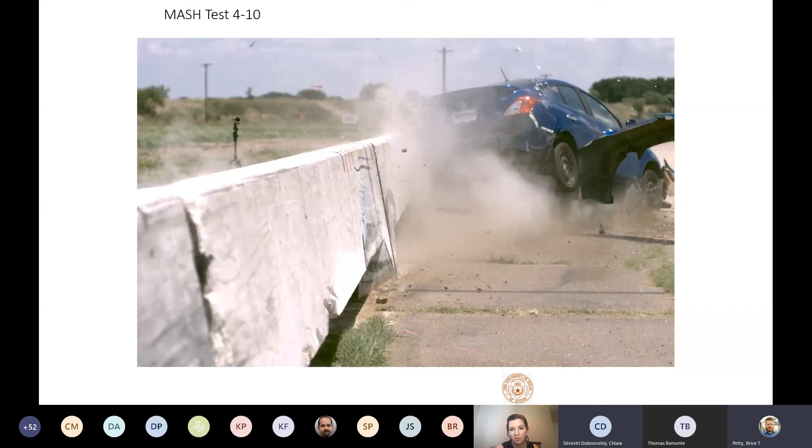According to the MASH criteria, we have to test the system for Test Level 4 conditions or high-speed applications with 3 different vehicles. One is the passenger car you're looking at right now, and it will impact the system at a nominal 62 mile per hour speed and 25-degree angle. The purpose is to make sure the vehicle is contained and redirected, which is what happens, and that the vehicle stays in stable conditions. In this case, we only had a maximum roll of 18 degrees, so it was a pretty good test.

Specifically with passenger cars, we're looking into occupant risk, making sure that what the occupant would feel in terms of velocity and acceleration is acceptable. We didn't have any issue there either. The maximum deflection in this test of the barrier was a dynamic deflection of 1.8 inches, and the permanent deformation was only 0.4 inches. So we know the barrier has passed this test based on all the MASH criteria.

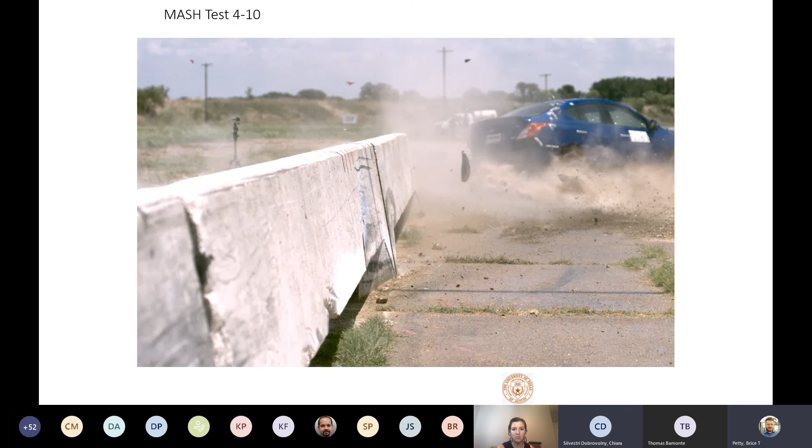Next slide, please. Next one. Okay, then we're missing the pickup truck and the SUT. I don't know if you have it, try maybe to go back. Go back.

I think this was a subtle hint that we're 5 minutes or more past the adjournment time. Okay, maybe you could move to conclusions. Yeah, that would be great.

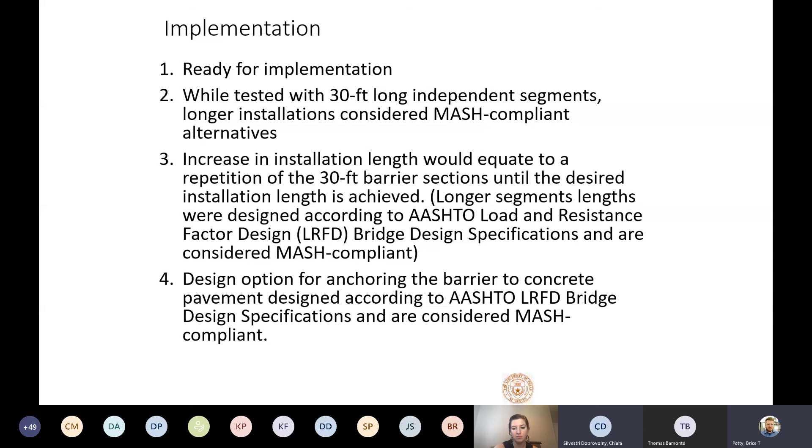We did perform 2 more full-scale crash tests, one with the SUT, the single unit truck, and one with a pickup truck, and they both passed. So the system is basically ready for implementation. Just a couple of comments without going into all the details of implementation: while we tested with specific anchorages for flexible pavement, we also developed anchorages for concrete pavements. So this barrier will be ready for implementation with different types of anchorages for both a concrete slab or flexible pavement as needed. I don't know if there are any specific questions.